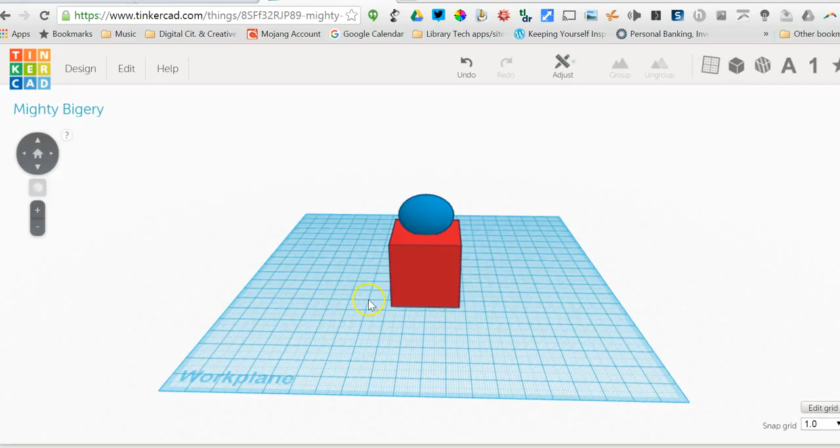Okay, now that you have your egg shape onto the cube, I'm going to show you a better way of doing that than just placing it on the cube.

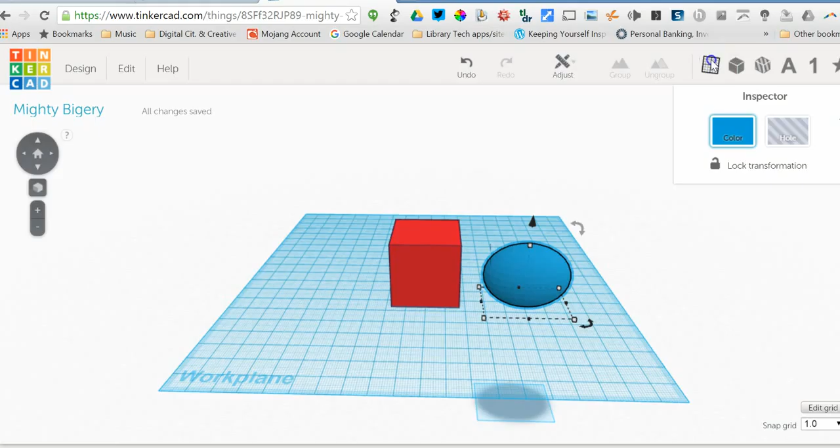The best way is to come over here and grab a helper. If I click on this next to the cube, I see my work plane helpers right here. So I grab the work plane, drag it over, and place it right on top because that's where I want my egg. Now that it's there, I can bring my egg over, and you can see that blue shadow underneath will help me place it on that square.

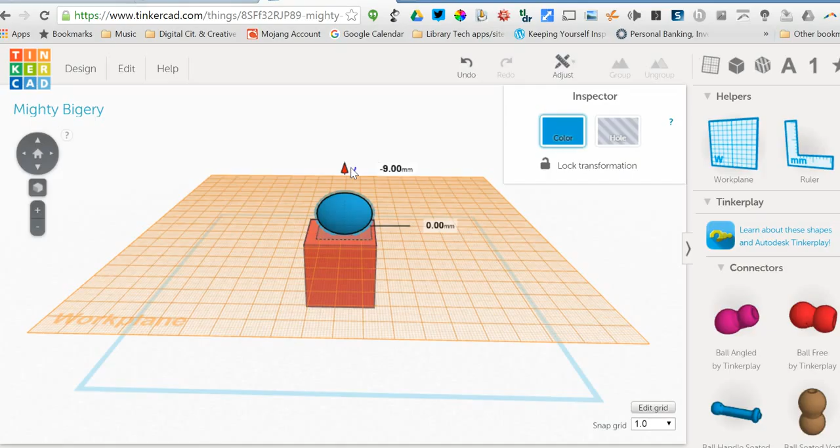Very nice. And if I click on this cone, it will tell me how many millimeters it is off the cube, and I can put it exactly on 0, 0, which means it's touching the cube. If I didn't have this orange helper here, it would not show me that.

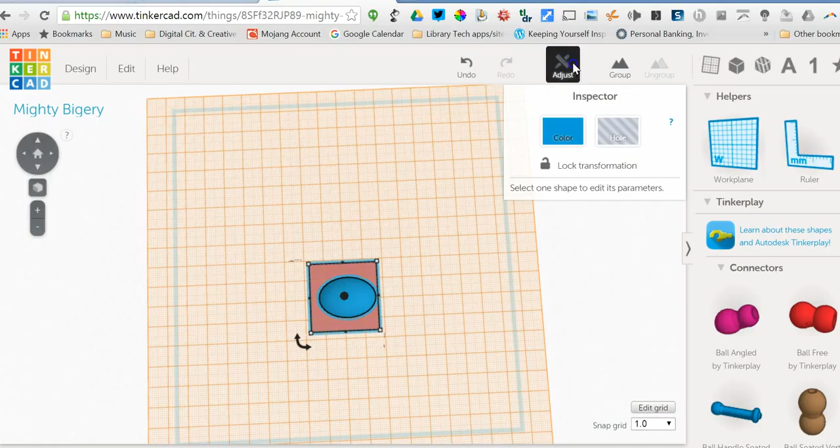Now I want to align this so it's in the center, and that's easy to do. You're just going to do a left click and surround the two objects you want to align. Go up here to adjust, click align, and then click on the center option. As you see, when I click a button, it shows me what it's going to look like. That's not it.

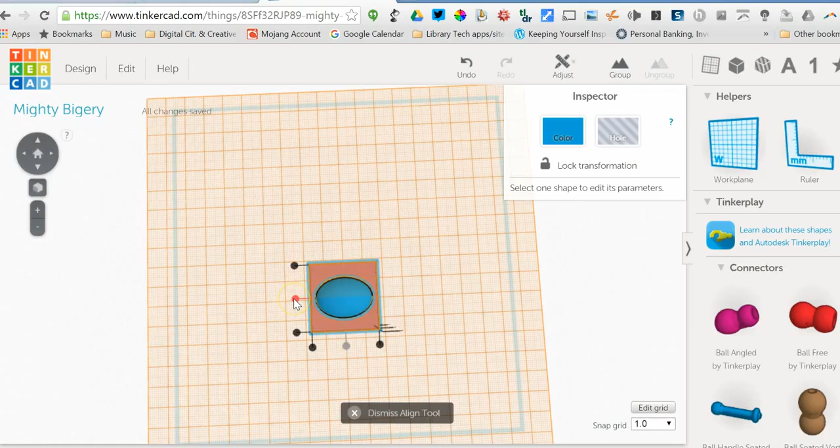There's 1, 2, 3, so this one's in the center. That's aligned on that side, and there's 3 on this side. So I'll click align in the center on this side, and now it is aligned.

Very good, so we are almost done. Now if we were to print this, even though it's touching, let me zoom in here—even though it's touching, they might not print together. So you always want to sink one object into another just to make sure they will come out connected when you print. To do that, we're going to sink it 1 millimeter.

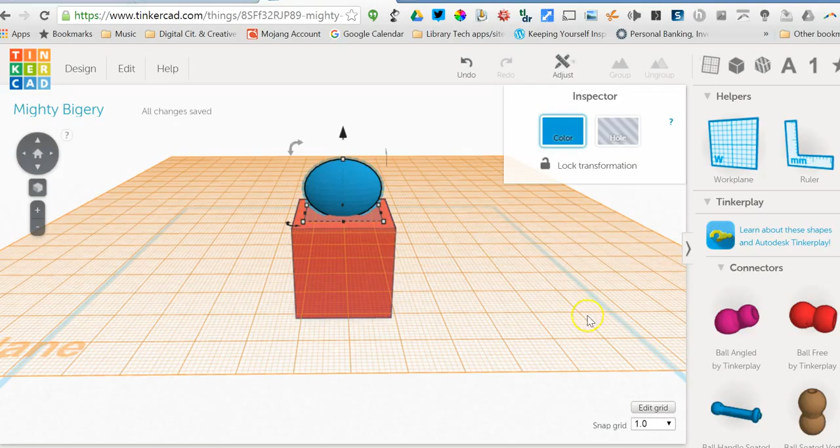This orange thing is here, and it'll tell me exactly when it is -1. That's all I need to sink it to make sure it's touching. Okay, so I've sunk it -1 millimeters. Now I could click on my work plane here and then click on the blue and it will disappear.

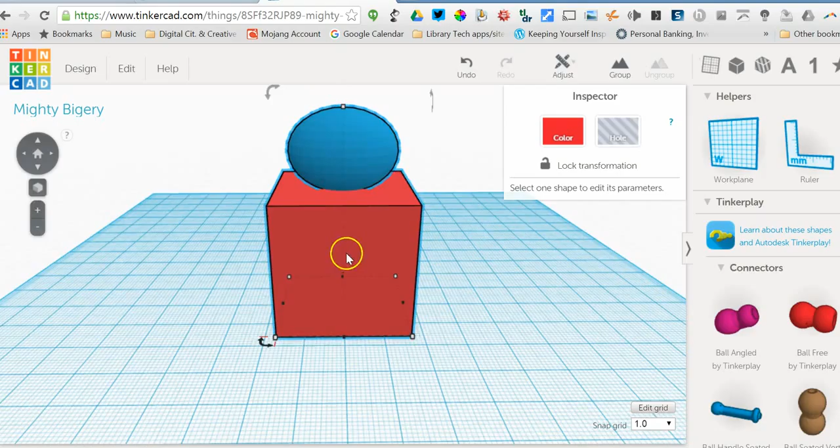Very good. Now if I wanted to move this whole thing around, I could do a square around it, and you see it's both highlighted in blue, the square and the egg, and that allows me to move it around. Now if I do something over here, it's going to unglue it and it won't be together.

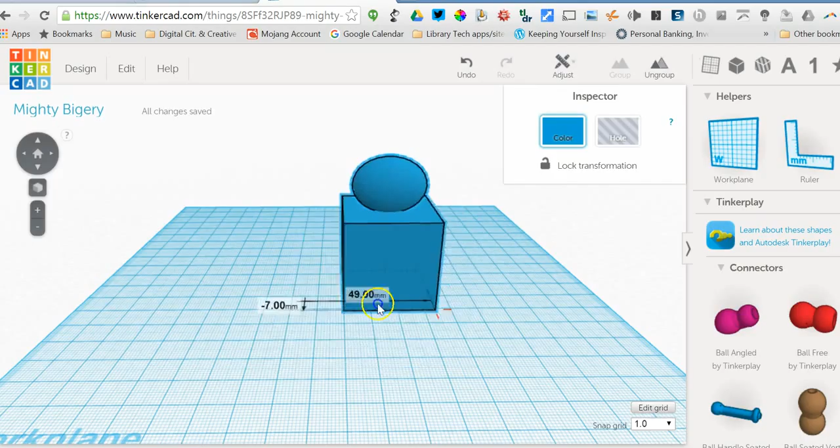If you want to permanently group things together, you're going to highlight both of them and then come over here and press group, and now it turns both of them the same color, as you can see. And now even if I click back over here, it's going to be grouped and I can move it anywhere I want.

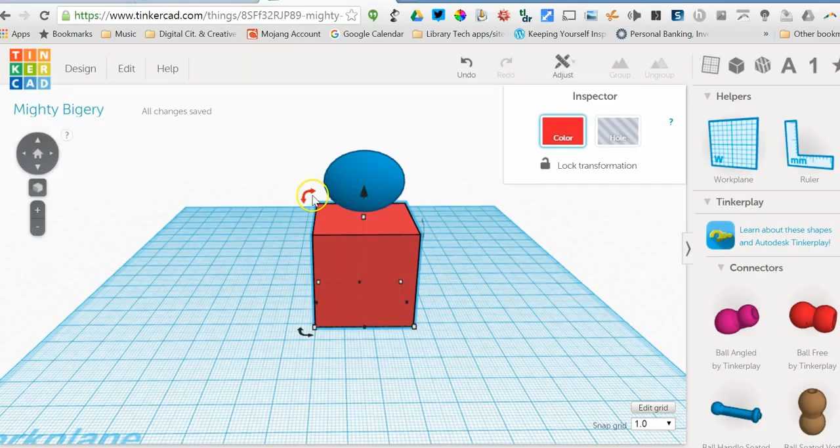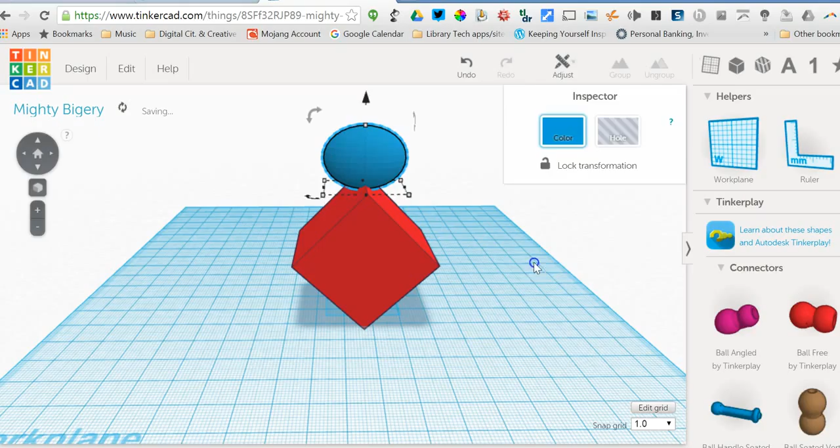So I bet you can guess what we need to do to ungroup it. If I wanted to move this egg or move this square, again select the square and just ungroup, and that allows me to move things as I wish. So say if I wanted to move this square at an angle, maybe at 45 degrees, and bring this up—just showing you that you can move things around when you ungroup them.

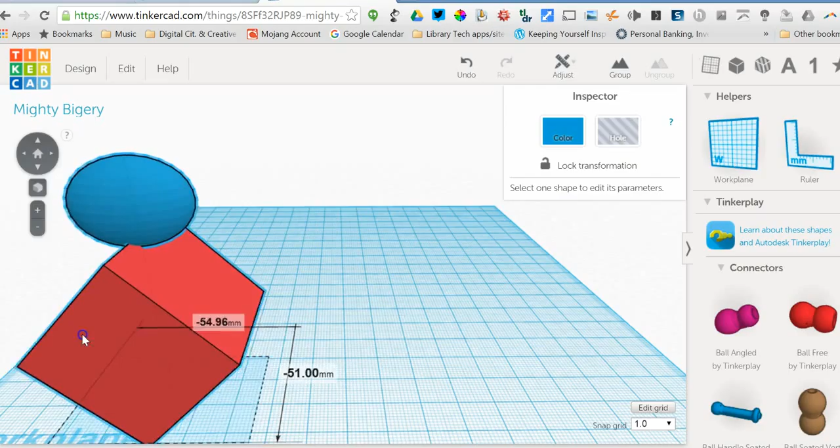I also want to show you something interesting. If you notice the numbers here, does anybody see anything interesting when I move it to different areas? Okay, you see that's a -53. That's both negative, you see the numbers are changing. That's a -45, and down to -50, -60. So the top number goes from a positive to a negative when I go right to left, but the bottom number always stays negative.

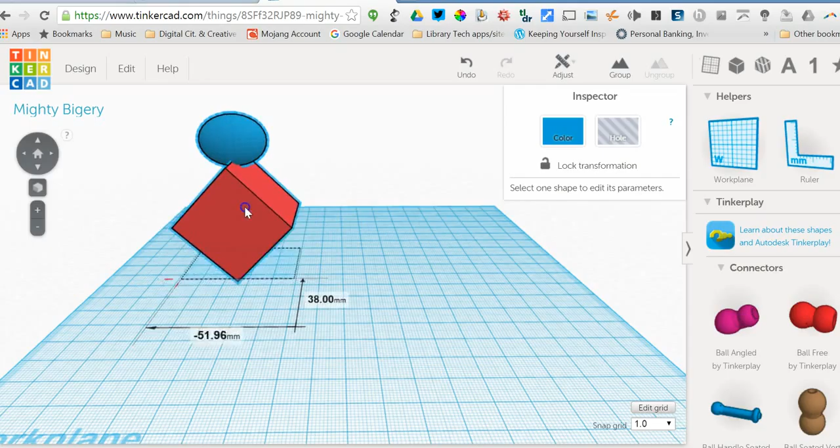If anybody knows anything about graphing or coordinates, this could be a great exercise for learning math. Okay, same thing at the top—both of these are positive if I move it in this area. But if I move it over here, the bottom one goes negative and the top one stays positive. See if you can figure out exactly where those X and Y lines are for your coordinate axes.